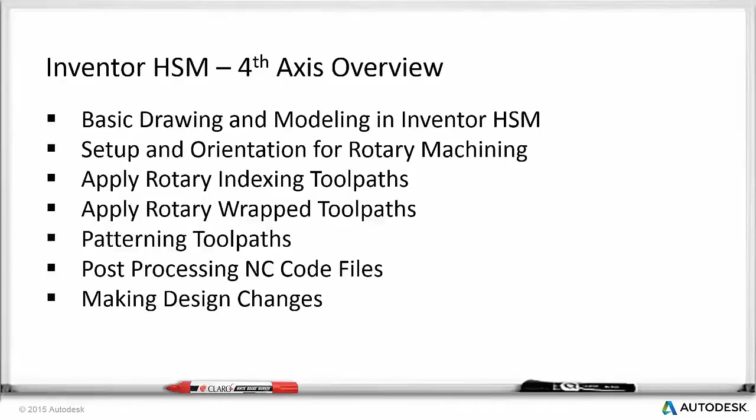We're going to apply some of those new rotary wrap toolpaths that are inside Inventor HSM. We're going to show you how to pattern those toolpaths around the part, post-process, get some code out so I can show you how it's rotating around the part. And then we're going to make a design change and see how it's completely integrated inside of our CAD and our CAM. We're going to walk through that easy-to-use interface.

This is the part we're going to look at. It's a torsion adapter for a vacuum cleaner, and we'll draw it up from scratch. Then we're going to put some toolpaths on it, put some rotary axis, put some drills on there, and then do some of the new wrap toolpaths.

So let's get started. We're starting from scratch today, so I'm going to walk through creating a brand new project to start working with. This is the Inventor project that I usually work with when we do a lot of our demos and training. I'm going to create a brand new project from scratch, so I'll go to Projects, New. It's a single user project, but if you have other users that you're working with, you can make a Vault project as well using our Vault. I'm going to give it a project name, we're going to call it our 4-axis rotary.

I'm going to point to a folder on my computer where I want data to go and stay. On my desktop, I created one called 4th axis rotary. We'll open that up, and that's where it's going to save the parts. Okay, I'm going to go to Finish.

Now I have a new project to work on. In my new project, I have no files yet, so we're going to start from scratch, a brand new file. So I'm going to go to New. We're going to start a new standard part and create it.

I like to work on the plane that's normal to the Z. So I'm going to start my rotary part going around the x-axis. That's going to be my a-axis rotation. So I'm going to draw in the XY plane today. In Inventor, it's the front view. In CAM, it's the top where our Z is, but in Inventor and a lot of the CAD software, the front view is where the Z comes out. So I'm going to work in the XY plane.

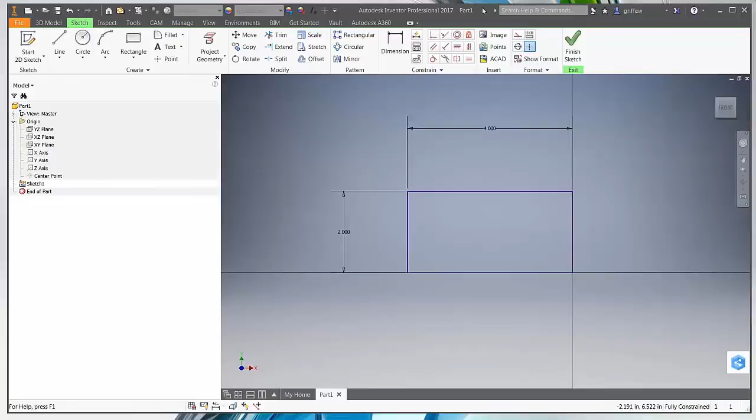Sometimes I leave it in because down here I like to show off in this corner, and sometimes I get feedback that people can't see that corner as we're working through some of the functions. But that's okay. If we expand, we can see a lot of that graphics view. I can even stretch this back a little bit so we can see a little bigger.

Okay, so I'm going to start a box going from left to right. I'm going to select all those lines at the same time and change them into construction lines. Now this is going to be the basis for the profile of my rotation, of my rotary part. In this case, it's going to be like a tube part.

So I'm going to choose another rectangle. I'm going to start in this corner where it snaps and turns green, and I'm going to have it snap. If I hover over that line, you notice the constraint—it recognizes when that line is connecting to the dotted line or the construction line. So all I have to do now is define the thickness of the wall of my tube, because I'm going to rotate this around the X.

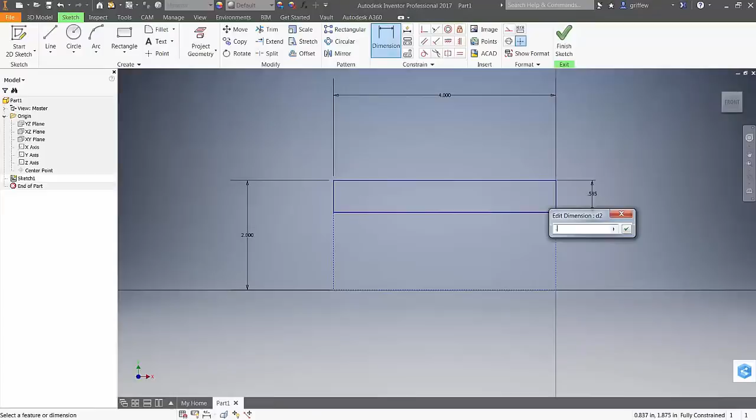So I'm going to choose a dimension, and I want this to be 3/8. Now I'm set up to rotate this part, or wrap it around the X, and have it as a revolve. So I'm going to finish that sketch.

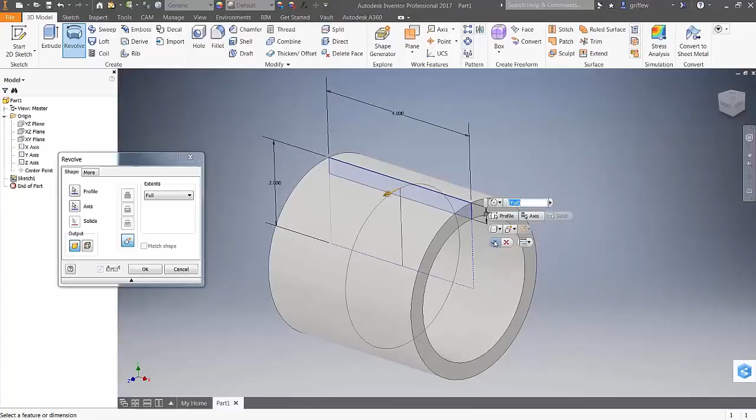Now I want to revolve that profile, so I'm going to go up to revolve. It recognizes the profile; all I have to do is select the axis of rotation. So now I have a revolved part—it's a tube, the shape of the design, and it's also around that x-axis.

So I'm designing the part so that it's going to work when I go to bring it in and be able to revolve it around that axis. Inherent in my design, I'm setting it up so it'll work well when I go to do my toolpath and work on it in CAM.

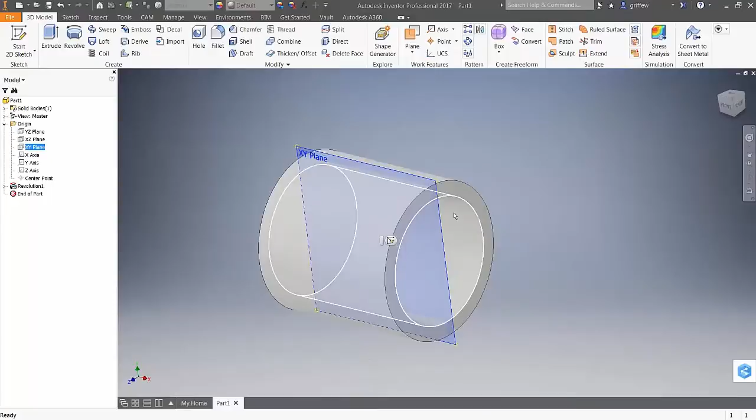Okay, so I'm going to have some features on here. This is the front of the part, and later on I'm going to consider it the top. So I want some features on that front plane, which is my XY plane. But I also want to put features where it intersects with the front and back of the part.

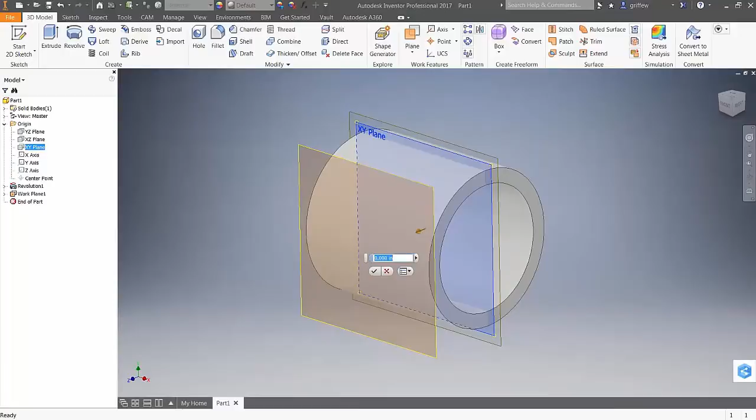So I'm going to add some offset planes. I'll go to plane, offset, and offset from this plane 2 inches, giving me a plane in the front that I can put some features on. I'm going to do the same thing—select that same plane, and offset it -2 inches.

So now I have some planes that I can work 2D geometry on, which I can project, or emboss and engrave onto the side of the part. We don't need to see them right now—I can always select them later. So I'm going to highlight them while holding Control, right-click, and hit Visibility, so now I can hide them so they don't get in the way of what I'm working on.

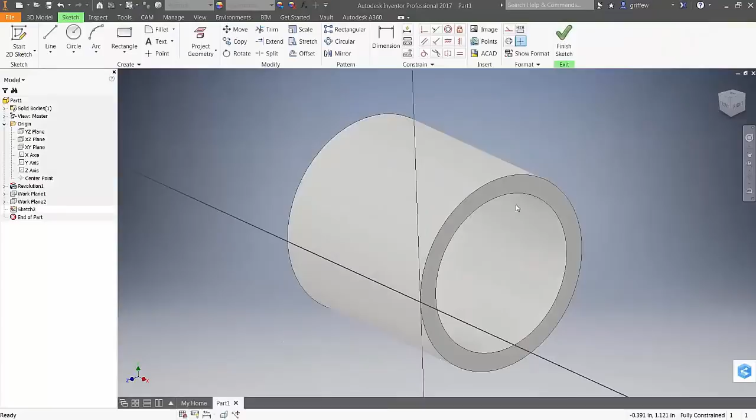All right, so I am going to do a sketch on that front plane. I'll simply select the work plane and then select New Sketch. I'm going to go into the front plane here, and I'm just going to simply put a rectangle in. I'll draw it, starting from scratch.

I'm not even going to put any dimensions—you can add dimensions here, I just want to show you can do this. If I just put a rectangle in space here, I can move it and stretch it, and add other constraints onto that rectangle.

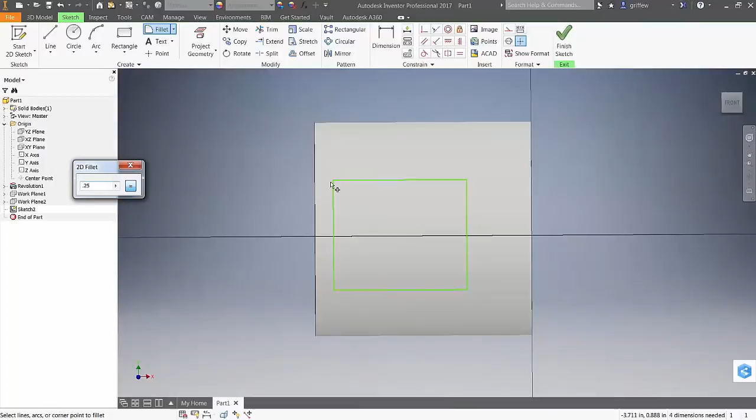All right, so I'm going to add some fillets around here. Right in the corner, I'll put a 1/4 inch fillet. If I hover over the corner, I get a preview of what that fillet will look like. All I have to do is click the corner, and I get those fillets on there.

Okay, so now I'm going to add some dimensions after the fact. I want this to be 2 inches, and I want this to be the width. I'll make this 2.5 inches.

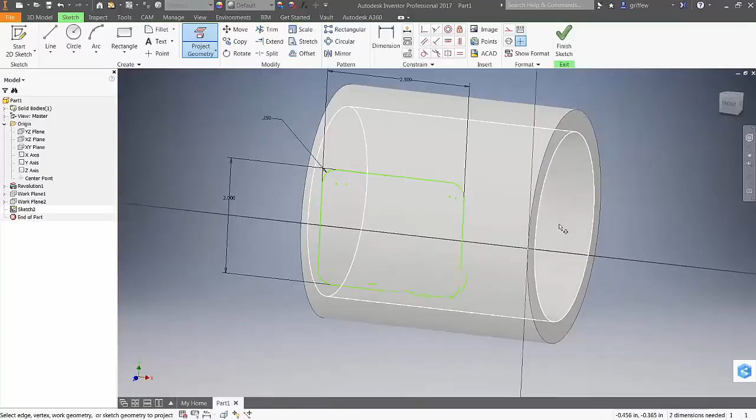What I didn't do is project my point in here, so I'll do that now. I'm going to go to the center point, project it in, and now I can measure from that center point. The reason I'm doing this is I can also project any of this profile geometry, but often when I work, I like to add features that I can turn off and on later when doing CAM or other operations. If you project those features in, they're now linked, so if you turn off something in the past, it'll turn off another feature in the future that depends upon it. So I like to work independently. I want this dimension to be from the center point or the origin.

So I'm going to put another dimension from this origin to that line there, and I'll make that 1.25 inches, or 1 1/8 inches. Let's make it 1.25 inches. Okay, so now we're constrained, except now I can move this thing up and down in this plane.

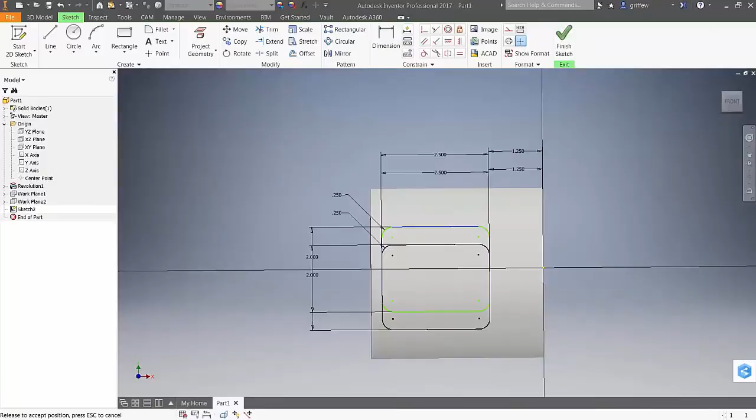Now what I want to do is add a construction line down the center, and I'll show you we can add some symmetry. I'll just make that 4 inches. And now I want that to be symmetric about the center line, so I'm going to make that become construction geometry. And now I want to add symmetry.

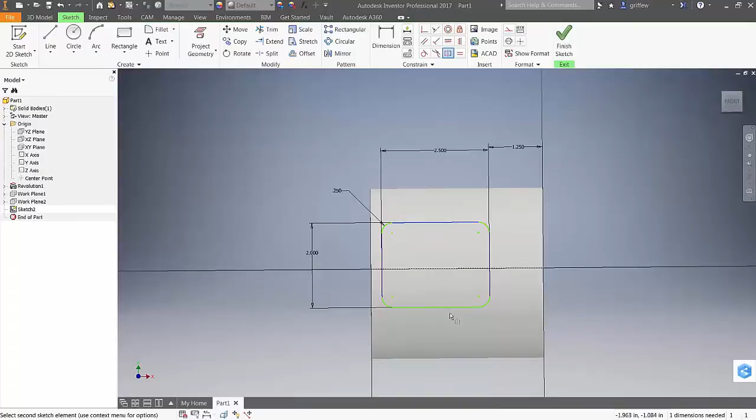So I click symmetry, and down here in the corner it says select the first sketch element. We'll choose the top line there. Then it says select the second element. And now it says select the symmetry line, which is that center line. And now I have a symmetric constraint. So as I change this, I'll make it 1 inch, and you'll see it'll stretch from the center out. So that's a way to add constraints as you're working on your design.

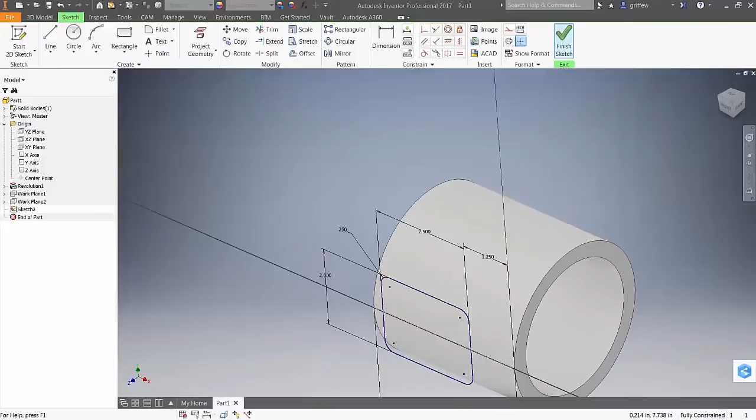Okay, so now I want to get this projected, not as a cut through. I don't want to cut it through, I want it to wrap into the cylinder. I want to cut through as a wrap around the cylinder. Now, there's no direct project for wrap, but what I do is this.

I go to Emboss, and this is the Emboss tool. You can use this to engrave too. It can be text in different shapes and different types of geometry. In this case, it's just this box, this pocket, so I chose to engrave it.

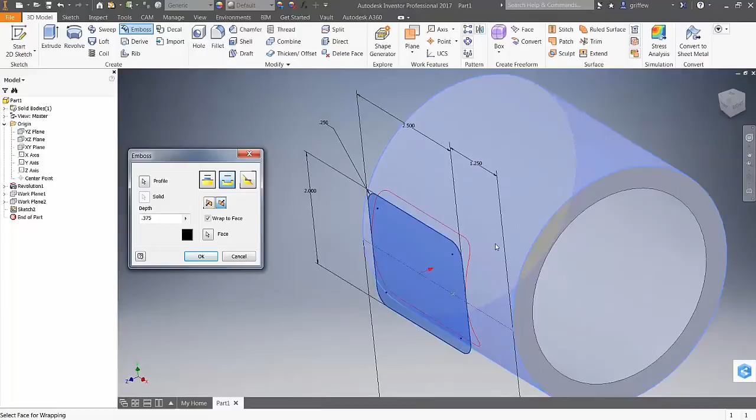I can give it a depth, and I know my wall thickness is 3/8, so I'm going to go 0.375. And I can tell it right here, wrap to face, so now we can wrap that geometry right to that face. It projected through because it's looking at the direction I want that to wrap, so it's looking at the direction to cut through. I'll simply flip the direction, and now I'm cutting it and wrapping it through the part as if I'm going to engrave it. Say OK, and now we have a pocket through the part that's wrapped around that cylinder.

So now I would like to have 5 of those go around the cylinder, so I'm going to highlight the Emboss feature that I just created. Go up here and select Circular Pattern. Let me bring it over. So I'm going to do a circular pattern around.

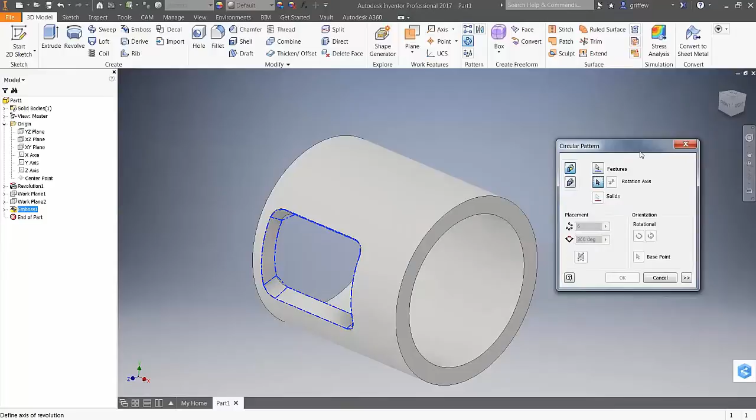So it wants to know what's my center rotation axis. I can just simply select one of these cylinders, I'm going to select the central one, and I want to make 5 of them. So now I'm going to wrap 5 of those pockets around the part. I'll say OK, and now I have those pockets wrapped around.

Okay, so now I want to add some hole features that are going to be on the back side, because the front side is the center of the pocket. The back side is going to be this rim right here, and I'm going to put some hole features on there. So I'm going to flip it around, my Z is going the other way. I'm going to use this work plane 2 that I created to put some holes here.

So I'm going to edit on that work plane sketch, and I'm just going to put a line across here, and I want to put some points going across that line. So what I want to do is create a line. I forgot to project my center point. There we go. I'm going to create a line.

We'll make that 4 too. Now I want to be able to have a point on this line. It doesn't matter if this is construction or not, I'm just going to put a point on that line in space. Now if I drag that line, or that point, it stays along that line.

Now I'm going to add a dimension to it, because I'm going to make a pattern of 5 of these. There we go, I made it an inch and an eighth, or an inch and a quarter. And now I'm going to add a pattern of 5 of those points, and those are going to be the center points for my holes.

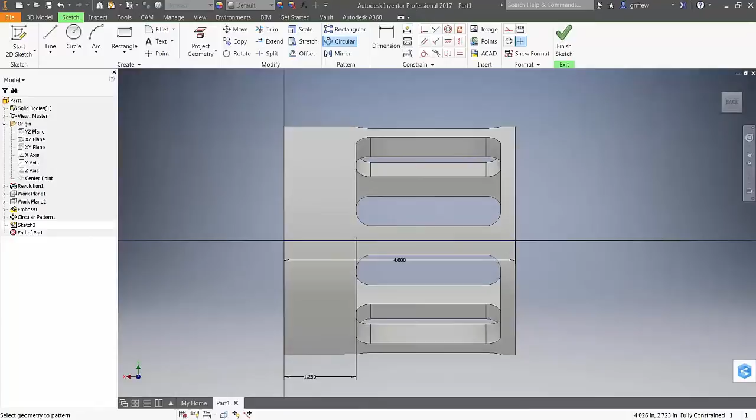So I'm going to go up to do pattern. That's circular, I'm going to change this to a rectangular pattern. Come here, and I'm going to select that point, choose the direction I want it to go. I'm going to select this direction, and I want to make 5 of them. So I select 5 and then give it a distance.

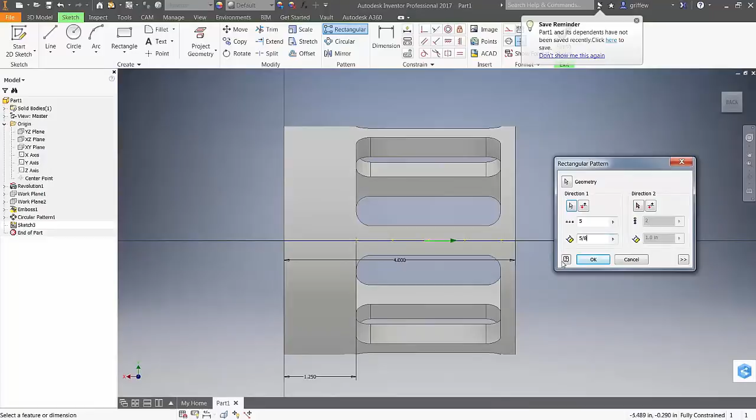I'm going to say, you can even do this, you could say five eighths. So you can even use fractions in here, and it works out nicely. So now I have 5 holes. I'm going to select OK. At least 5 positions for those holes where I want them to go.

Finish that sketch. Now I'm going to highlight the sketch. I'm going to go up to add a hole, and it recognizes those points on the sketch as places where I want to put holes.

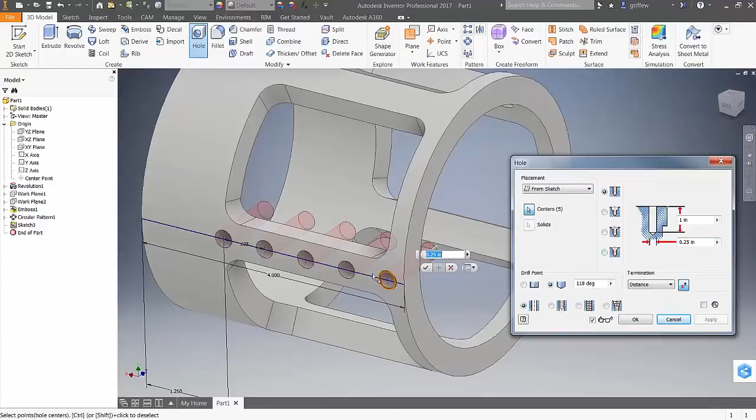These are a quarter inch, I don't have to change that. I want them to be quarter inch holes, but I don't want them to go all the way through. I want them to be a quarter inch deep. Now you can add threads, you can add a tapped hole, you can add other features to it. It's going to put the drill point in, but these holes don't have any taps, so I'm going to leave them the way they are.

And now I have a set of holes. So all I did was create a sketch on that plane that's adjacent to the face of the part, and I added points and just selected hole. Again, I can pattern those around.

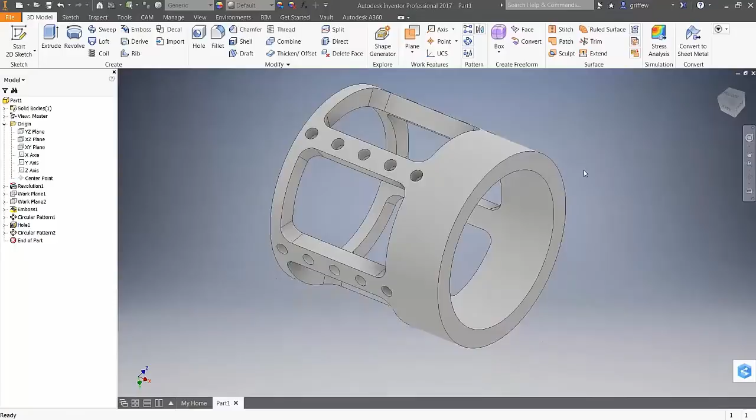So if I select the hole, go up to circular pattern, it wants to know what's the center of my axis of revolution. And I'm going to choose 5, and now I have those holes in that plane, each of those planes. So later on, we're going to index around to drill those holes.

I have one more feature, these little fingers, or these slots that are in here. So I'm going to select my work plane, we can work off my work plane too. And I'm going to create a sketch on that work plane too, and I'm going to create a slot right here. I'm going to go in and project in my center point, create a slot.

And it's okay, I'm going to make it a half inch slot. And my diameter is going to be, my slot hole is going to be a half inch. Okay, so it's okay if it hangs off because it's going to be an open slot. And this is one quick way to be able to get that feature.

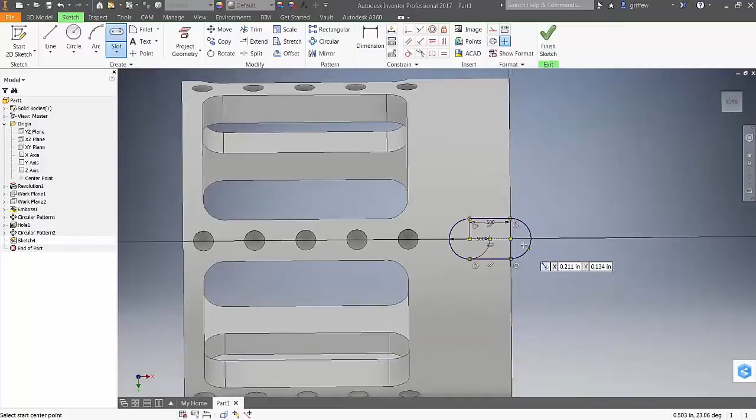Again, the same way we did it before, I'm going to emboss it. We want to do the engrave. If you remember the last depth that we used, if I change the projection, it'll project to the other side. I'm going to wrap it to this face and then say OK. And now I have that wrapped slot feature.

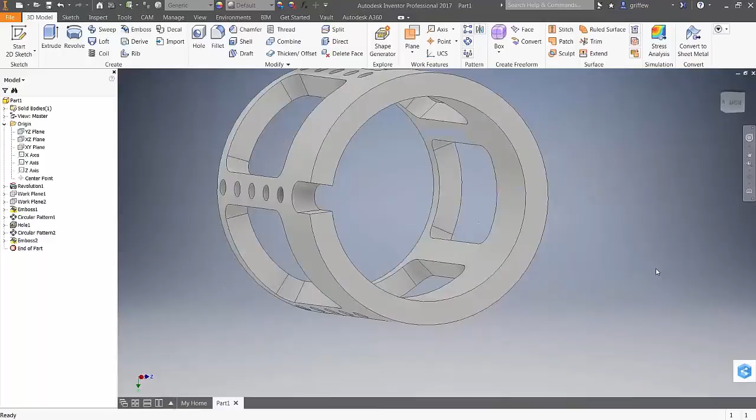Going to add a radius on the corner here and go into my fillet, grab this edge, and I'm going to grab this edge, and we'll make it a quarter inch.

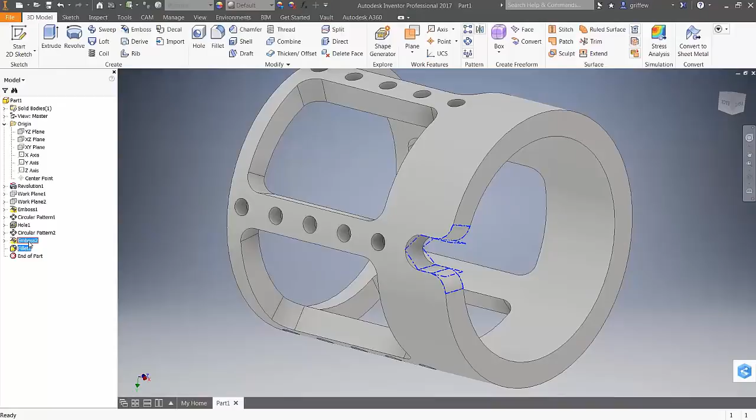And now I want to be able to make a pattern of those features that go around. There's 8 of them. So I'm going to grab and hold Control, get the fillet and the emboss, make a pattern going around that feature. It wants to know what's the rotation axis because it's highlighted blue. The next thing is, how many do I want? 8. Okay, and now I have those features, those finger features.

So that's the part we're going to make. We're going to set it up to be able to make this on the machine, on our rotary axis table or A-axis table. And I'm going to save it before we do, so I'm going to go up to Save. It knows the project because we set up the project, it knows where to save the file. And I'm just going to call this one, this is my torsion adapter.

Save it. I'm just going to jump in for a minute here, Wayne, and say this is the first webinar, I think, where we've gone through how to model a part. I'm seeing some great feedback from users that they like watching you do that. And I think it's great.

A lot of the times we think of CAM as just the toolpath, but a big part of CAM is, in fact, creating the geometry of what you're going to do and creating the fixtures for what you're going to do.

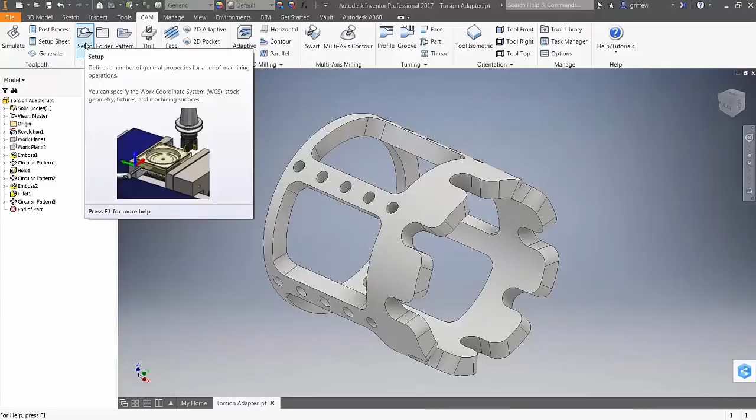And the important step, especially when you're setting up for a rotary axis, is to do your setup the right way. So the first thing I'm going to do is click up here is my setup. You have that in-context help when you need it. The manual's there whenever you need it. So I select Setup. I'm going to stretch this over a little bit. I'm going to lose a little bit on the graphics, but I'm going to be able to see more of those tools over here.

So initially I select Setup, and it recognizes on mine that I want to either do turning or mill turn or milling. In this case I'm going to do milling, but you can do both in this interface. So you can work the same exact workflow as you're working in milling, you can do in turning as well. So in this case we're going to switch it to milling.

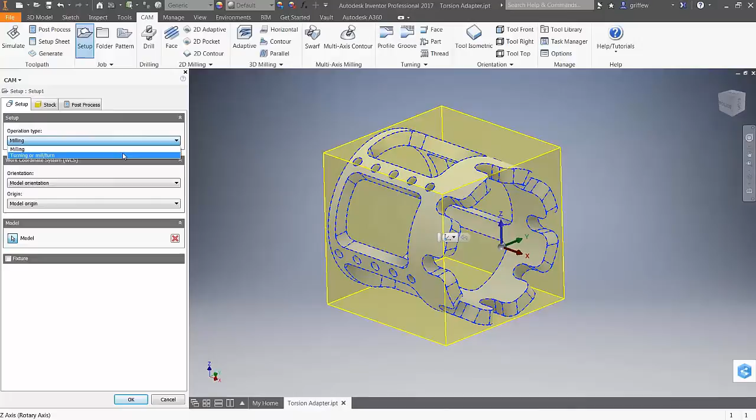It recognized the Z is up and my X direction, and that's the direction we want to rotate around. It's not often going to be that case, but we set up this part and drew it in such a way that that will happen. But that's the idea, to always have your part, if you're going to do rotary axis around the A axis, make sure the X axis is the center of the cylindrical shape of your part.

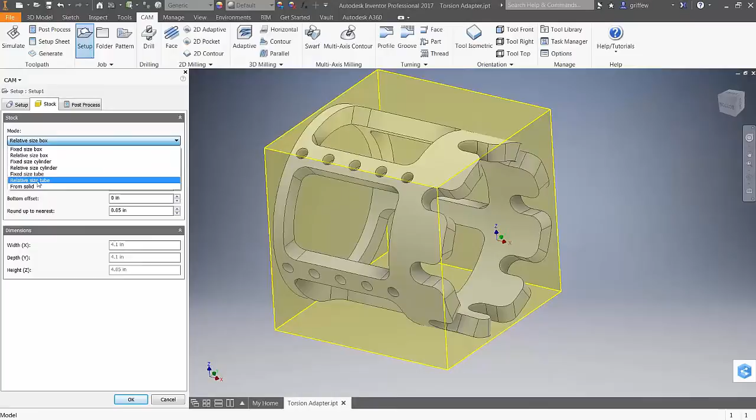So the first thing now I want to go into my stock and set it up as a cylindrical tube. So I can go into relative size, down here, a relative or fixed size tube. I'm going to use relative size tube, and it recognizes almost as soon as I choose the center axis, it'll recognize the boundary of the inside and the outside, the OD and the ID.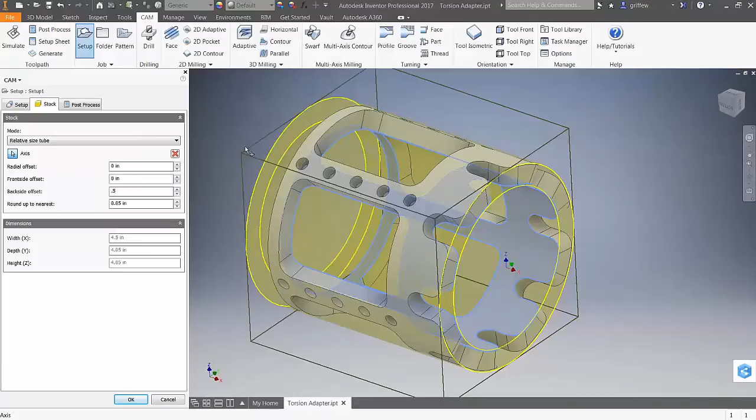So I can add some radial offset. In this case, I'm going to leave it at 0. For this webinar, we're going to leave it at that shape. But normally, I would like to leave some on the back here, so you can do a backside offset. Let's say we even do that, say 1/2 inch, so we can hold it into our chuck there. I probably would add 1 inch. But that's just to show you can do this in this interface.

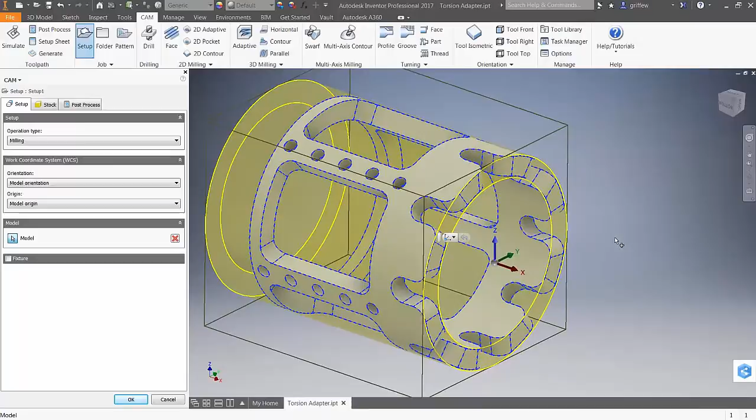So my setup is looking pretty good. My Z is pointing up sort of in the middle of that pocket right there. And I can show you, I can reorient that Z. Let's say we want to set this part up in a way where our Z is going to be pointing up normal to those holes. So the first thing I want to do is drill those holes in the Z so I have 0 rotation.

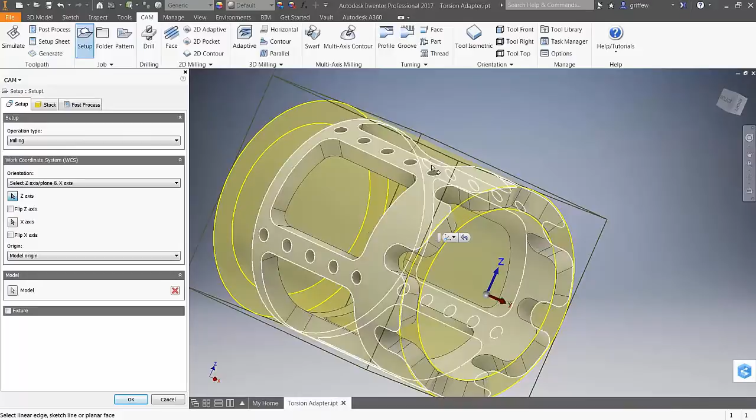What I can do is I can select my Z axis. You can do it this way, or you can simply select the shaft of the Z and then select a feature like that hole, and it'll flip it. It recognizes the hole vector and flipped it over. What we need to do is just flip the Z axis like this. And now we're aligned with the center of that hole. That's one way you can align it with a feature of your model to have it aligned the way you set it up in the machine.

Okay, so if you're going to rotate it this way, just make sure you select Z-axis rotating. Your plane is going around the X-axis because you don't want to rotate around the Y, because that'll flip your part this way.

Okay, so now we have the axis the way I like it. The Z is pointing up towards that hole. Those are the first holes I'm going to do. So I'm set up the way I'd like to see it in the machine. I'm going to say OK. So there's our setup. Now we're ready to do some toolpaths.

So the first thing I want to do is drill these holes on top. So I'm going to go up to the drill toolpath. And I forget what the size of that hole is, so if I hover over, I have a short-term memory here. But if I hover over, you see down here in the corner, it'll give us feedback over whatever hole it is that we're hovered over. Even arcs that are in the same plane, you can see those as well.

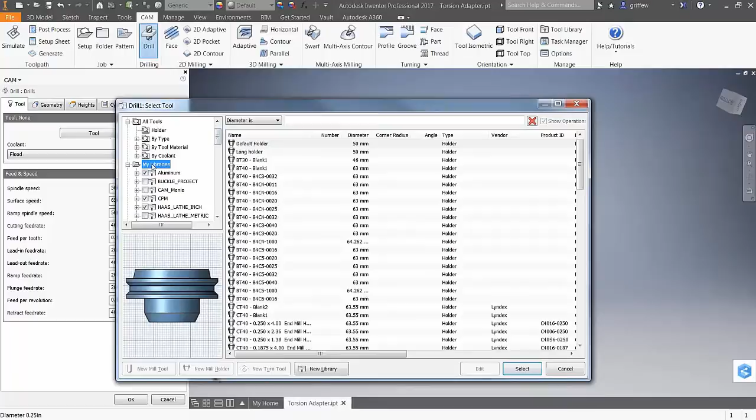So this is a 1/4 inch, so I'm going to select the 1/4 inch tool out of my library. In this case, it's a brand new part. I have some libraries that I set up, and I highly recommend setting up a tool library that matches either your machine, what you have in your pockets, or in your tool crib. In this case, I have a bunch of aluminum tools. I have some steel tools in the library. It's easy, just right-click, create a new library, and you can start creating new tools, or you can copy them from our sample library. The sample library comes with a lot of good tools to get started with.

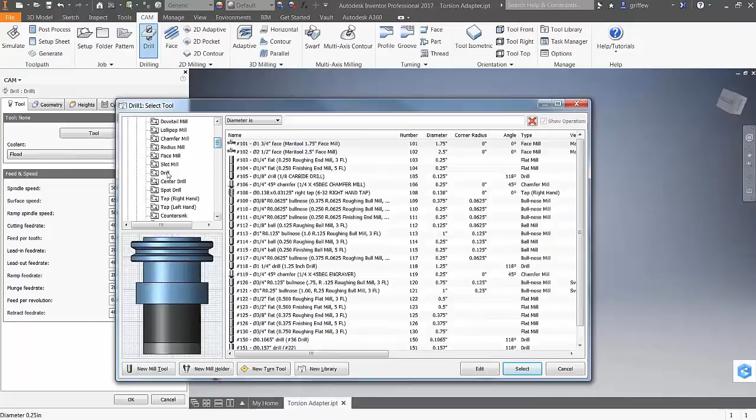In this case, I'm cutting aluminum, so I'm going to choose aluminum. I don't know if I have a 1/4 inch drill, and that's okay. If I don't have one set up, I can set one up. I'm just going to simply search by type. I'm going to search by drill, and I'm going to filter on the diameter, which is a 1/4 inch. And now it filters on tools in my various libraries that I can choose and work with. Let's select this 1/4 inch drill right here.

Brings in the feeds and speeds of that drill.

Wow. And so the next step is to select my geometry. Now I want to select the hole faces. That's the first thing that's lit up blue here, so I'm going to select this hole face. Because it's in the same plane as my Z, I don't have to choose any rotation, and we'll talk about that in a minute. So since I'm in that plane, I'm able to select the same diameter of any holes that are in the same plane. But notice it didn't select the diameter of any of these other holes because they're not in that same plane right now, with X, Y, and Z up.

So Wayne, can I jump in for a second here? There's a bit of a question in regards to work offset setting versus the tool orientation. I'm going to answer the question at a high level. If I get it wrong, Roger's asking the question, just go ahead and clarify.

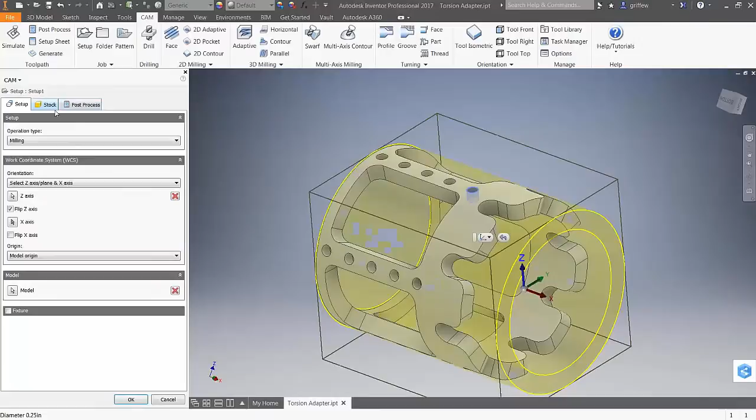So the work offset setting in the setup is defining where Z is going to be pointing, what the orientation is when you set up your machine, when you initially set your work coordinate system. Tool orientation is used when you want to program the machine to rotate to a different orientation. So we use tool orientation to program the machine to reorientate the machine. It's what we call 3+2 programming, reposition that axis. But the WCS is set up to define the initial orientation.

Just as an aside, if there's new users, some people end up caught in this trap where what's a strength of the software ends up being a weakness. That is, if you create a toolpath without any setup yet, we're automatically going to create the setup and pick what we think is the correct direction for Z, and then we found some new users are then using tool orientation to rotate the Z. So as a reminder, the setup is defining how the machine is set up. The tool orientation is programming the machine to rotate from that initial setup to a new orientation. We're looking to update some of the documentation to help people with that, but I don't know if that was the question. I think now is a good time to bring that up.

So again, the work offset in the setup is going to define how that setup is set up when you initially put the part in your machine. Sometimes it's going to be wrong if you create a tool path and we automatically create your setup for you. Tool orientation is used to program a fourth or fifth axis to rotate the machine to that new orientation. Hopefully that helps your question, Roger. If there's more to it, feel free to ask. Sorry to distract you in the middle of your flow there, Wayne, but it felt like a good time to answer that question.

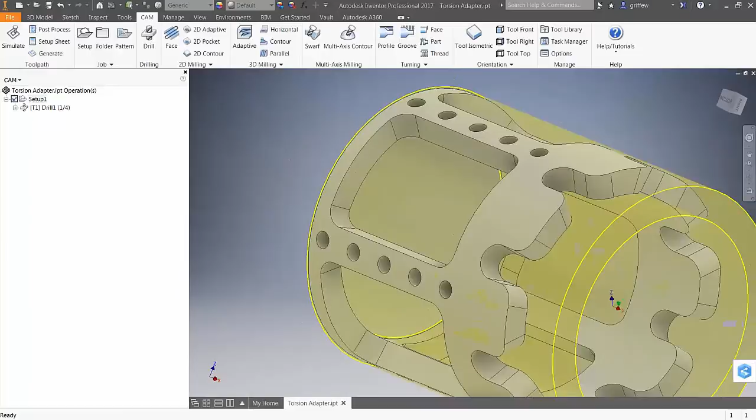No problem, Al. That's actually a really good point. I often like to think of it this way. As Al mentioned, this setup is really matching the way it is initially set up in your machine. So if the Z is up, the X and the Y are set in this position, that's the way it's sitting in the machine. I often like to think of it this way: if I'm going to manually take this out of the machine, rotate it, and put it back in, then I would do a new setup with that new orientation. That's a manual operation of reorienting your part, taking it out, putting it back in. You would use a new setup because then it won't give you any rotation. It's going to be a new WCS, if you will.

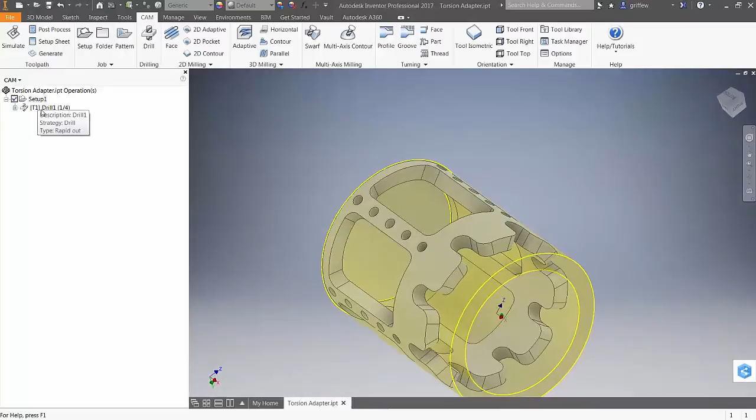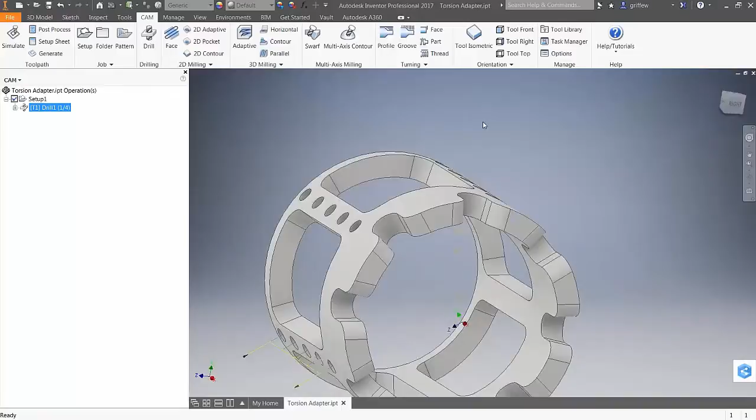When you're in one setup and you do a drill setup like this, and we're going to do this in a second, I'll show you. If I want rotation call when I post, I want to do it in the same setup. That's when I'm going to use tool orientation, because I'm going to reorient the part to the tool to get that rotary call so it knows I'm doing drills on these holes. Then I'm going to rotate it again, so I'm not doing that manually. I'm having the machine do it, and I would do it in one setup. But the initial setup, as Al mentioned, is the way it's initially set up in the machine. And then we're going to now put toolpaths, which will now manipulate it as the machine's running.

So in this case, we have this drill set up. Let me go back in and show you. I selected that geometry, just a few more steps.

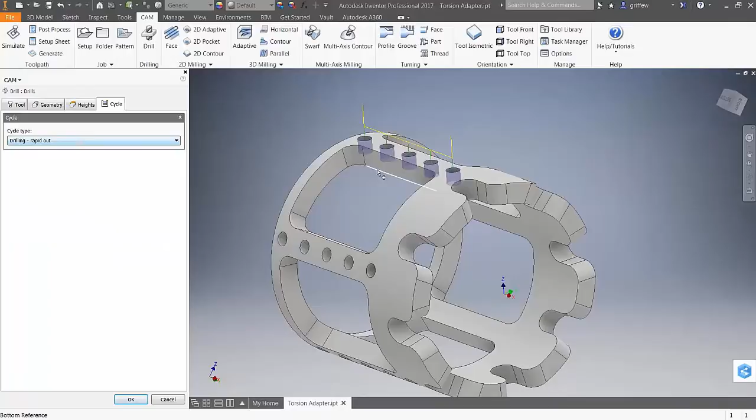Now, I won't have any rotation out of here when we post out the code, and we can take a look at that in a minute. It's just going to stay on the Z top, and it's going to come in and drill those.

Now, what I want to do is I want my rotary table, my machine to rotate around to have those holes now presented to the tool. Now, I'm not going to physically move it, I want it rotated in the machine. So that's where I would do it here.

I'm going to add a new drill cycle. Notice it's still oriented from that last initial orientation. So if I go into my geometry, now I want to do tool orientation. Now I'm going to change that Z - see, it's highlighted Z, I'm going to rotate that Z. In other words, I'm going to rotate the part around.

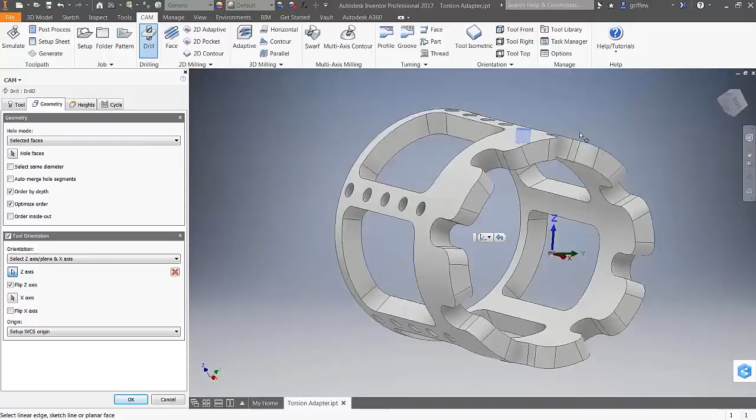To be normal to this hole - it flips the Z because it sees the vector going this way, so I just simply need to go over here and flip the Z axis. Now I have this Z normal to that hole. This is where tool orientation comes in because that's going to give you a rotary call to move to this position. So I don't have to do a new setup at all.

So now in the same case, now we're in the same plane, I can choose select the same diameter. And now it should grab - oh, I'm sorry, I only selected that as my plane, I didn't select the hole yet. So I'm going to select the hole faces, this hole, and then apply select the same diameter. So I'm going to hit OK.

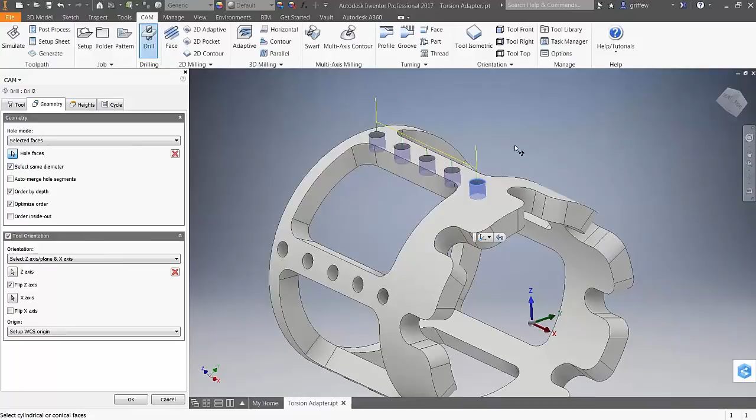And you'll see on this drill tool path, we're oriented like this. And on this tool path, it's going to rotate around in my rotary around the X, or around the A, and it's going to give us this tool path.

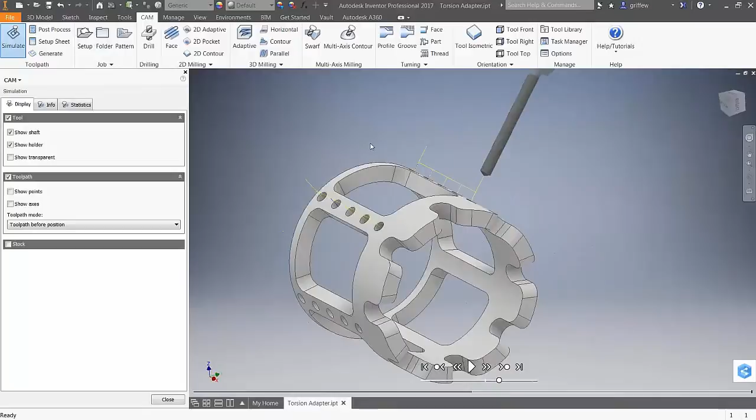So we can do this in setup. If I highlight setup, I'm going to simulate, and it'll show us the tool moving, and it won't have the part rotate around, but it'll show us the tool where we're drilling those holes.

It rotates around, and we're going to drill these holes now. That's how we get indexing, by using that tool orientation in the toolpath.

So if I post out this code, I'm going to go up to setup, and we'll post real quick just to show you. I'm going to use the Haas with A-axis, works well with the rotary table. Post out that code, overwrite what I had before, and now we have the lock codes, 0 rotation.

It's going to offset, it's going to come down and do this G81, run that cycle on those holes. Then down here we see on drill 2, it unlocks, rotates A72 degrees, locks again, and it does the drill cycle on those additional holes. And then down here it returns back home to A0.

So we get rotary code that we can send to the machine to rotate that drill cycle around.

Maybe just a quick introduction or point - you may bring up post later, there is a requirement for some post customization. Some posts have more flexibility than others. A lot of people said they had Haas - we have a default Haas A-axis post that does assume the A-axis is on the right-hand side of the table. If your A-axis is on the left-hand side of the table, you need to rotate negatively around the X-axis. So just keep in mind it does take some post customization.

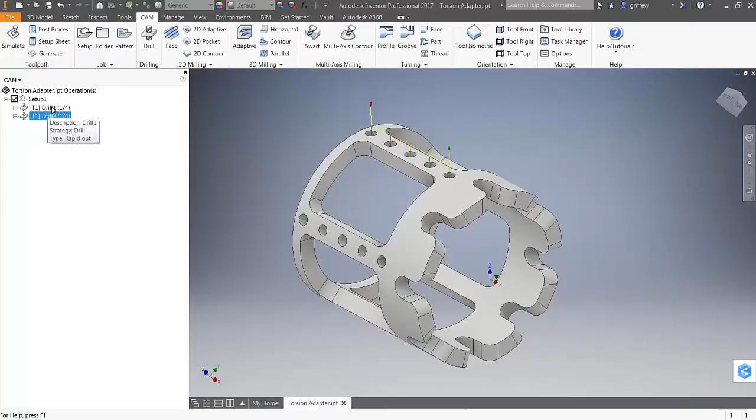So then you would think, well, if I have to get these additional holes, I have to do this process over and over again.

And we don't really, because we can do a pattern now. I'm going to take these drills, just to show you we can get rotation this way, but now I'm going to do a pattern around the part to get rotation. So I'm going to delete the second set I did right here, take these drills, highlight it, and go up into pattern.

I'm going to do, instead of a linear pattern, a circular pattern. It wants to know the axis of rotation, so I'm going to select that inside face, that inside rotary face. And I'm going to do it 5 times.

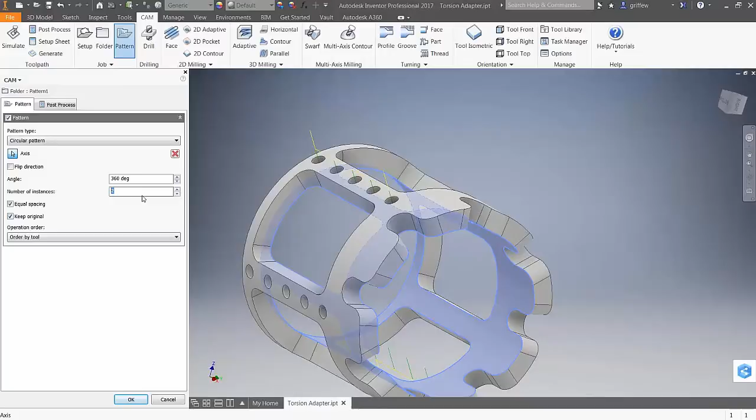You can see I can plug in that number according to the number of holes or hole positions I have there. You can also do order by tool. Later on, we're going to look at other toolpaths where we do a tool change. You can have it order by tool so it does all that tool first before it rotates, or you can do it order by operation, so it has all those operations done with the tool changes before it rotates around.

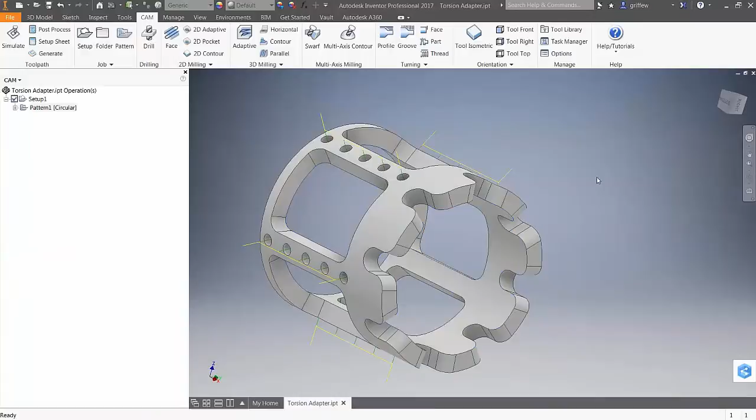In this case, I'll just leave it on order by tool. Select OK, and now we have this circular pattern. It's going to work its way and call up the rotation for each of those positions to index around.

Let me get back up to Z. And again, we can look at this pattern and post out that code. I'm going to do it really quick. As Al had mentioned, this is the one post. Oops, I didn't hit post.

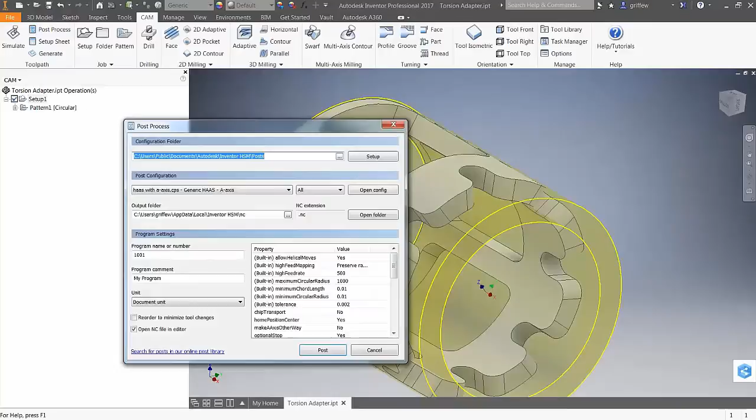The Haas A-axis. And we'll see it'll update and it'll give us each of those positions of rotation here.

Okay, so that's indexing. You can, of course, do the indexing and patterning with toolpaths. You can do this with all of our adaptive, pocket, and contour.

Before I go in to do those, let's actually do it. Let's go through, and I want to show you what has been added into our HSM. It's in Fusion as well, that you can go into our adaptive, our 2D pocket and 2D contour, and you can do a wrapped toolpath.

So I'm going to start off with this pocket right in here, and I'm going to do a wrapped toolpath inside that pocket. So I'm going to do a 2D adaptive.

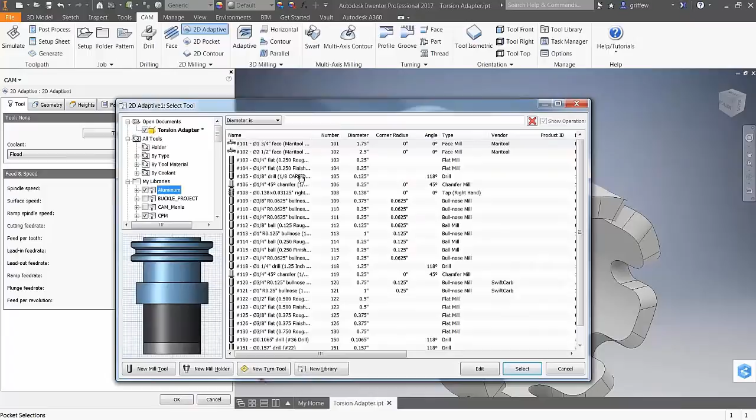Okay, working from left to right, that same easy to use workflow. Select the tool, I'm going to select out of my library, my aluminum. I'll grab my 1/4 inch flat end mill. I'll probably do something bigger, but I'm going to do the 1/4 inch for this webinar.

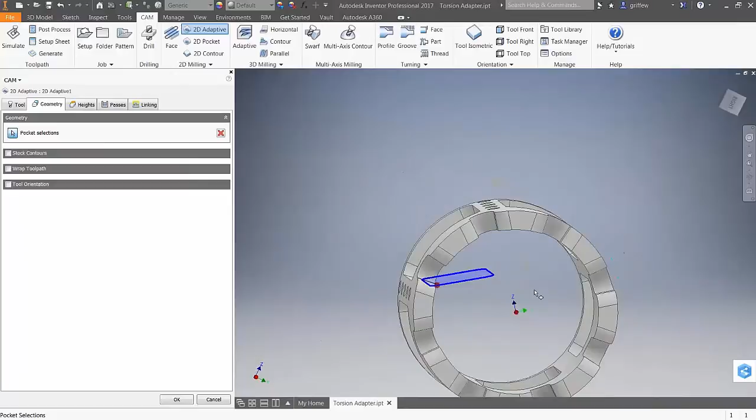And now I'm going to go into geometry. Now there's a function down here, wrap toolpath, and I just want to show you, I'm going to select this pocket edge right here, right down here.

And when I do, it wants to project it into the XY plane. It's not really wrapping anything there until I turn on wrap toolpath, and now you'll see it'll project. Right now it's got a red line, dotted line, because it doesn't know the cylinder we want to wrap around, or at least the radius of it. So that's what I want to select.

I'll select this outside face, and now you can see the geometry is now wrapped, where it's selected that area that's wrapped. And now we can apply the 2D adaptive in the same way we do if we're working on a flat plane. It'll work the same way now on a wrapped geometry.

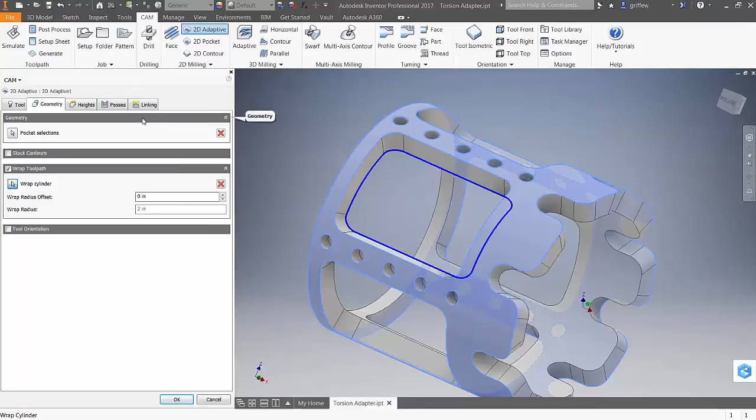I'm going to leave these things out of the box for now. I'm going to say OK, unwraps it, and then rewraps it around that geometry. So now we have... did I jump in? Yeah, please go ahead, just a second.

Maybe go back into that toolpath. I'd like to explain something. It's a difficult concept to understand for some, but I think it's worth mentioning. There's a few things that happen when we set the wrap cylinder. It'll set the center axis, but you're also going to see a wrap radius and an offset for the wrap radius.

What I'd like to point out is selecting that wrap cylinder is also defining where that chain is going to be—the tool is going to be accurately following the chain. The reason for this, I don't want to get too deep, but in order to properly create wrap geometry, you need to actually know the tool diameter when you create it, which generally you don't when you're doing your CAD work. So some part of the tool is going to gouge just because the edge of that side wall needs to be parallel to the center axis of the tool, but offset by the radius.

Again, it's probably hard for me just to describe. So basically what I'm saying is that it's going to gouge the geometry you've selected somewhere unless you modeled the part perfectly. This wrap radius or wrap cylinder is defining at what radius the tool is going to be perfect, and then it's going to gouge at the other spots if the geometry isn't perfect.

Hopefully that helps—at least play around with it. If we need to dive deeper, reach out to some of us and we'll see if we can put a video together to explain that concept. But I wanted to make sure everybody's aware of that. Feel free to post some questions if you want me to be a little more detailed at the end of the webinar. And again, sorry to keep interrupting you there, Wayne. Yeah, no problem, this is good information.

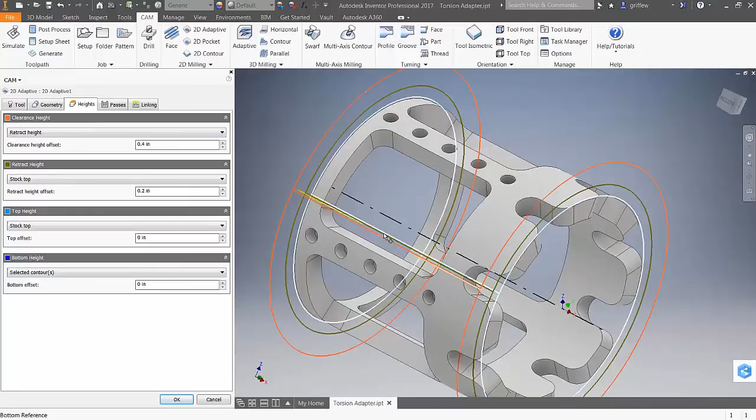Even with the heights, we can also put an offset so it drops down below. But again, as Al mentioned, you've got to make sure your geometry is exactly the way it would be as the tool comes in to cut that. So you can add an offset—you can do everything you can with the 2D adaptive, but it's going to wrap it around that geometry.

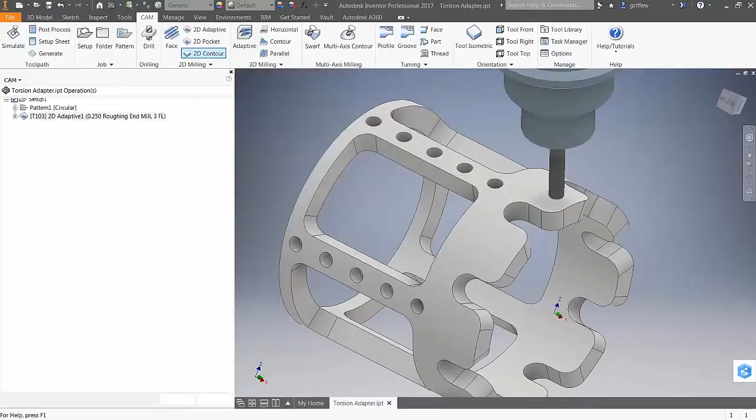All right, and we also have the 2D contour. I want to show you the 2D contour in this part. Actually, before we do that, I'm going to jump in and do this for the 2D contour, but I want to show you another thing first.

Somebody had asked earlier, okay, if I want that to go on all these different positions, we'd have to do another pattern—you don't. You can just simply drag it up into the pattern we did for the holes, and now it's going to be included in that same pattern. Now you'll be able to do the drills, then the holes, or the drill, tool change hole, or tool change pocket, and so forth.

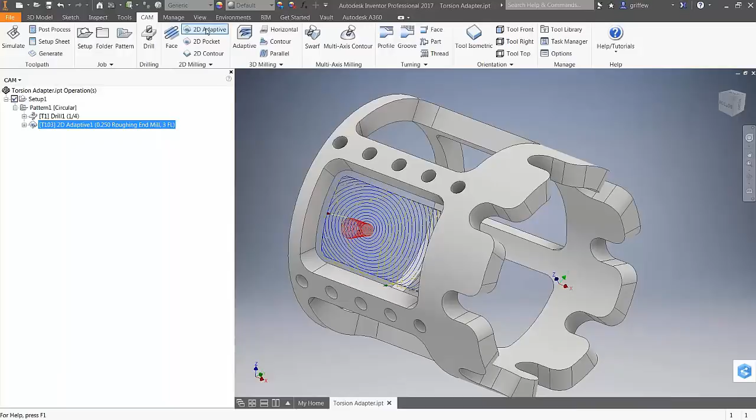But the same toolpath will work whether you're doing 2D pocket, 2D adaptive, or 2D contour to clean it up. You can just drag it into the pattern, the pattern kicks in, and you'll be able to do that rotary axis work.

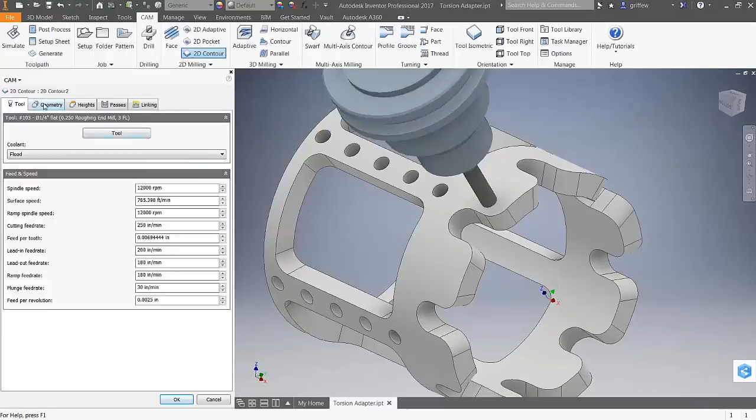So the next thing I want to do is a contour, and I want to work my way around this outer edge with the contour. So I'm going to choose 2D contour. The same tool will work. In my geometry, I'm going to choose that wrap toolpath.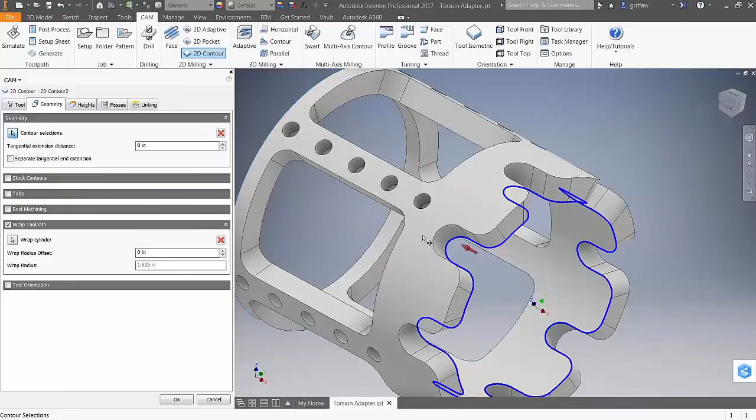For my wrap cylinder, we're going to do the inside. And then for my contour geometry, I'm going to select this edge right here. It selects that edge—I think the tool's going to start in this way. So I want to make sure I add some tangential extension distance because of where I selected the geometry as well.

Okay, let's say we add a half inch into there. I'm going to leave it like that—I think we should be okay. I'll say okay, and we'll get a contour that wraps around the front. I think I want to do that tangential extension differently on the other side. You see how it's going in?

So actually, Al, it's a good question while you're here. If I edit this, I'm going to go into my geometry. I'm going to leave this at 0. Is there a good way for me to change where I want that to start? Could I start it at this corner and ramp in here?

The best way is to use the entry point on the linking tab. There's an entry point definition. To be honest, it's a live question, I'm not sure how well it's going to influence the 4-axis. Let me describe what entry point does at this point.

Many people don't understand, there are 2 options: pre-drill location and entry position. Pre-drill location says there's a hole here, the toolpath has to start at the point I selected. Entry point is simply guidance, start as close to this point as you can, so it does or does not need to be along your chain. It's simply saying, I want to start close to here, looking at the front of my door, I want the toolpath to be on the front side of the part. You can select any geometry, it does or does not need to be on the chain you're machining.

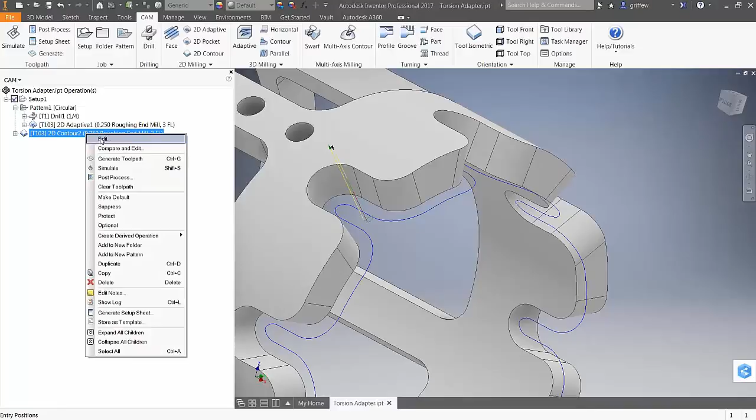Let's see how well it affects the wrap toolpath. Yes, it's around the corner a little bit. Probably going to need some more work on that, but that's the way you would do it. Thank you, Al.

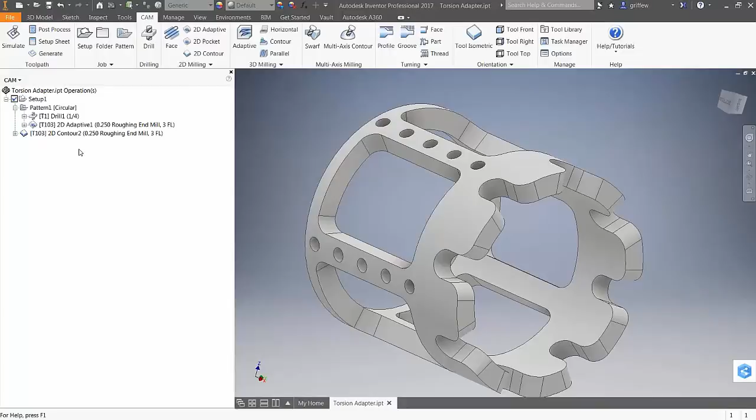While I'm unmuted, Curtis is asking where this is in HSM Works. There are a couple questions about HSM Works. It will be part of the first paid tier of HSM Works. It's not there now, we're targeting our April release. I've got to be careful giving dates, but we're trying to have it done in the April timeframe to get this moved over to HSM Works.

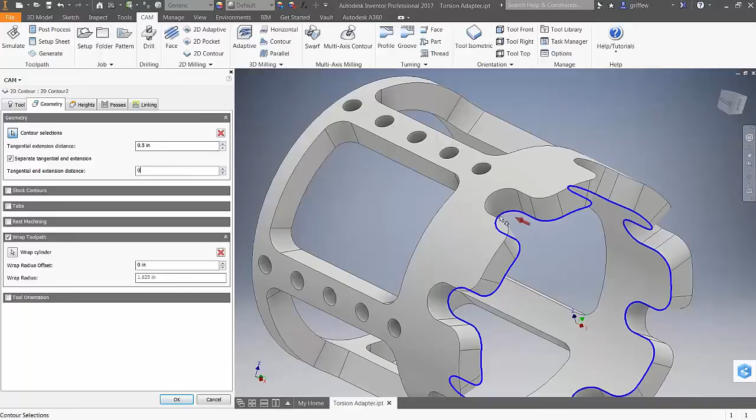Just a quick thing as I was looking at this earlier: one thing I was able to do, if it's helpful, I added that extension distance and then a separate one, and left this at 0. So when it comes out of the material, it's in the center of the hole there. At least in this setup for this toolpath, it works well. So there's always a solution, you can always find a way to get the toolpath to work the way you want it to.

All right, so that's wrapping the contour. It's going around that wrap geometry we made. But when we post out the code...

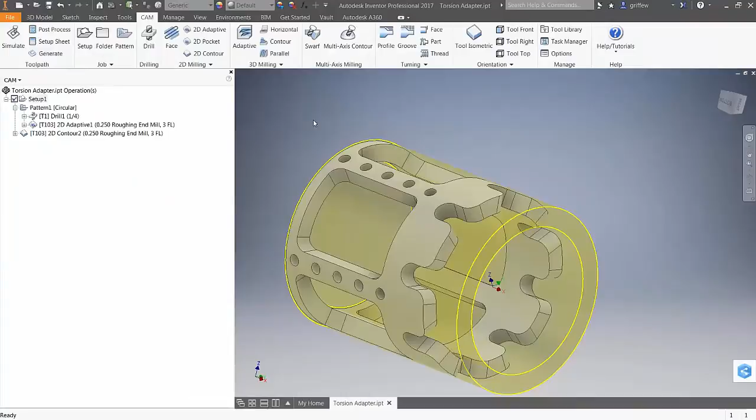So I'm posting with that A-axis, and there's our drills. We got our pattern for our drills. It rotates around, and you see we get X, Z, and A-axis rotation here. That's using the Haas A-axis post, as Al had mentioned. There may be some edits needed for that to be able to work for you.

As he mentioned, our forums are a great place to go. Let me bring up our forums. If you go to our main site, there's a link here, I can show you the main site. Go to the link to our Inventor HSM and HSM Works CAM forum. We have our expert elites in here, they answer questions, they're very active. There's a lot of information you can find if you search in here, especially working with rotary axis.

We have our Autodesk Knowledge Network, another great resource to go to. You'll find a plethora of information, links, places where you can find tutorials to work with. A really good resource, the Autodesk Knowledge Network. Again, as I mentioned, you can go to our main site, there's links in here, you can find a lot of information, especially when you're learning and new. Our Learning tab here will bring you to tutorials. We have our forum, you can click the link to our forum, which will bring you into that same page.

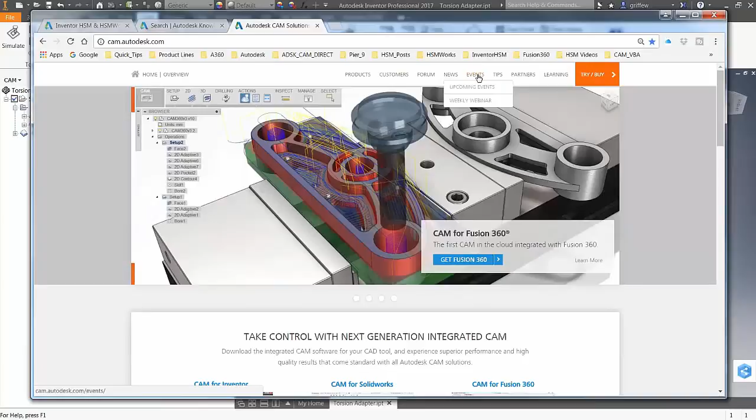Weekly webinars, we do have an upcoming webinar in 2 weeks. Carl Bass is going to walk through a couple of his projects that he used HSM on, and our team's going to be there, it's going to be live, on the 20th. It's going to be great to see some of the projects he works on in his shop.

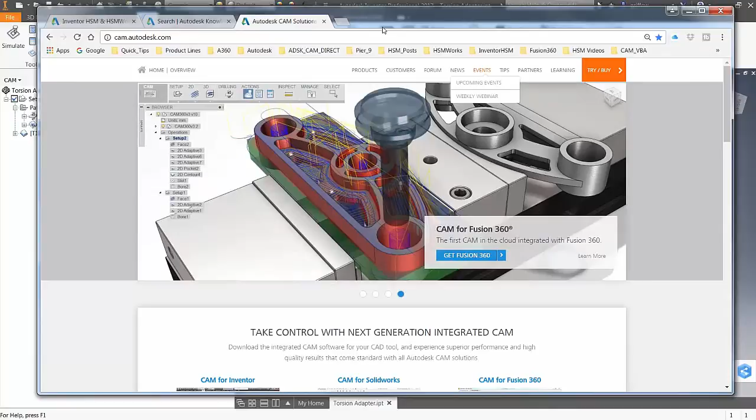Hey Wayne, quick question, who exactly is Carl Bass? Carl Bass is the CEO of Autodesk. He's a maker, he's awesome, he loves our CAM, he loves working with machinery. He's got his own shop. I know Al and Tim on our team work with him a lot. He's got a lot of projects going, heavily involved in manufacturing and in CAM.

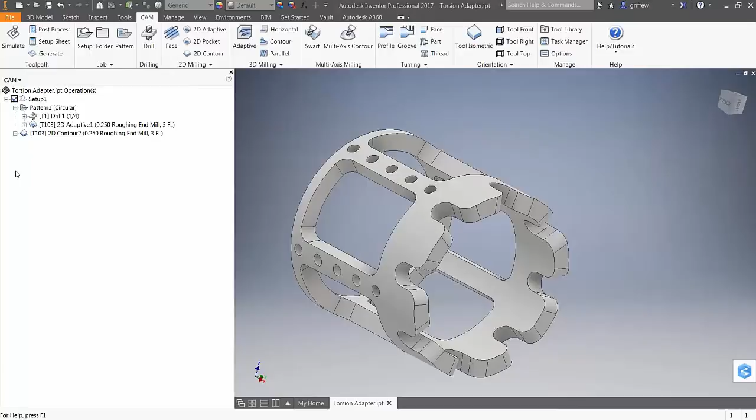Hey Wayne, if you're done showing your screen, I know this is sort of off script, but I'm continuing to see a couple questions about this concept I mentioned of the wrap cylinder. So I created a quick parametric sketch to show it. If everybody's interested, we can go ahead and show my screen. You're seeing my screen? I can see it, Al, looks great.

Okay, so I drew a quick sketch of a part here. It's sort of a typical view of a 4-axis part. What I'm showing is the geometry on the side, so that would be parallel to the tool.

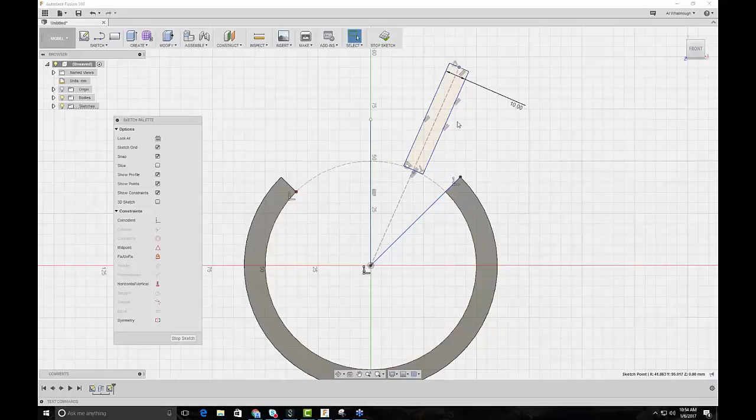I've modeled the way most wrap features work in CAD, or the way generally you'd model your part in CAD, where that edge is going through the center of the part. And that sounds like it'd be the right thing to do, it's most often how it's modeled. But the reality is you then have a tool coming over to cut that edge, and the center of that tool is also going through the center of the part. That's by definition the only thing you can do, because you've only got the 4-axis to rotate, not 5.

So what that leaves you with is this triangular sliver of material that's a result of this offset from the radius of the cutter. Hopefully that's making sense. So we're seeing the cutter coming around, but it's not able to machine that full part.

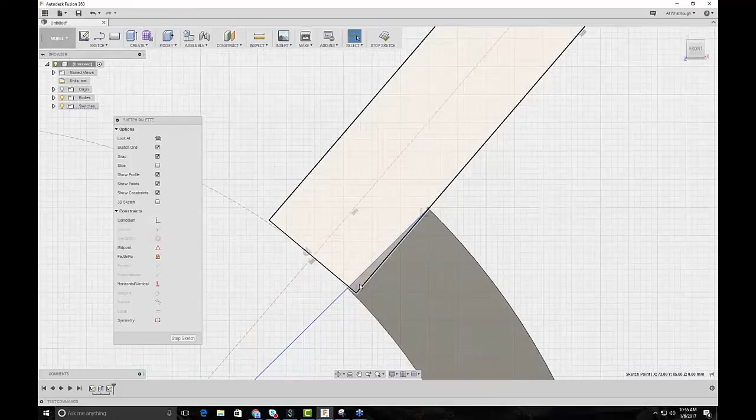So what the wrap cylinder is doing is saying that edge I selected, whether it's the bottom edge or top edge, is where the cutter is going to perfectly follow the geometry. If you select the top, it's going to perfectly follow at the top and gouge the part. If you select the bottom, it's going to perfectly follow at the bottom and leave material at the top. Or you can use that offset and find some balance somewhere in the middle, where it's gouging a bit at the bottom and leaving a bit of material at the top.

Of course, the other option is to become a CAD wizard. I mentioned at the beginning of the webinar, you can't really be a CAM person without knowing how to strong-arm the CAD system to get what you want. So obviously the other option would be to model the part exactly how it's supposed to be, but we gave some functionality there in the CAM environment to find the compromise that works best for your part.

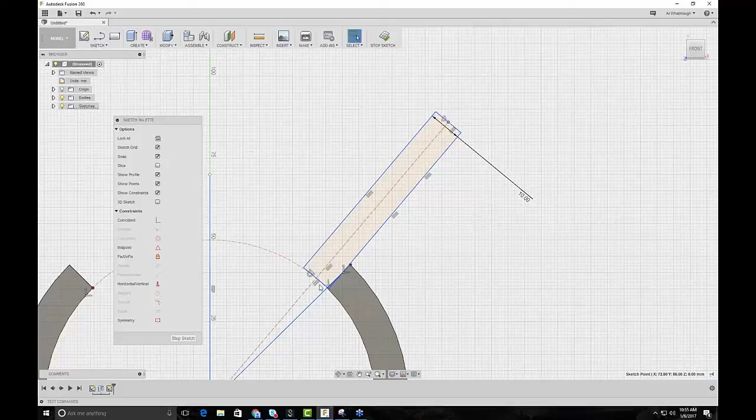Hopefully this little demonstration shows what the issue is. It incidentally highlights the same issue with using a swarf toolpath and locking it to 4-axis - that's the same reason it starts to fall down and give you some weird noise.